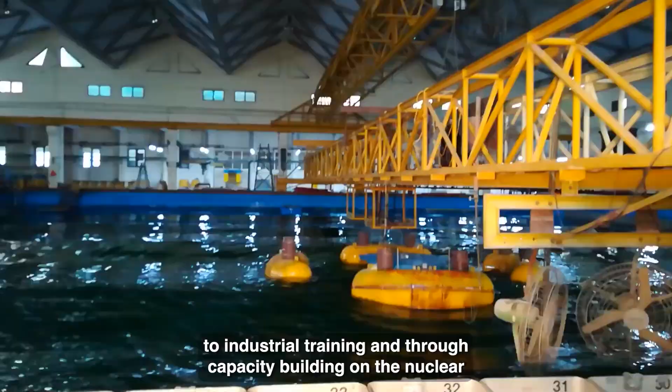This maritime engineering program is very special, with multidisciplinary input from mechanical, civil, structural, aerospace, naval architecture, chemical engineering, electrical, electronics, and applied mechanics. It is completely dedicated to industrial training and through capacity building in the new trade of the maritime sector. It's a booming economy offering job opportunities and research frontiers as India grows, with the Blue Corridor mission of the Government of India requiring maritime engineering growth. This program caters to that expected capacity building.

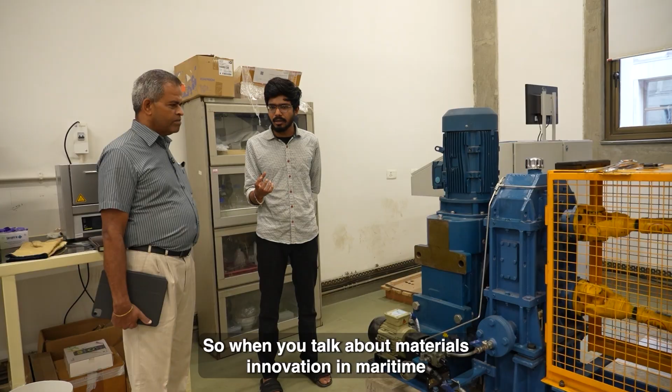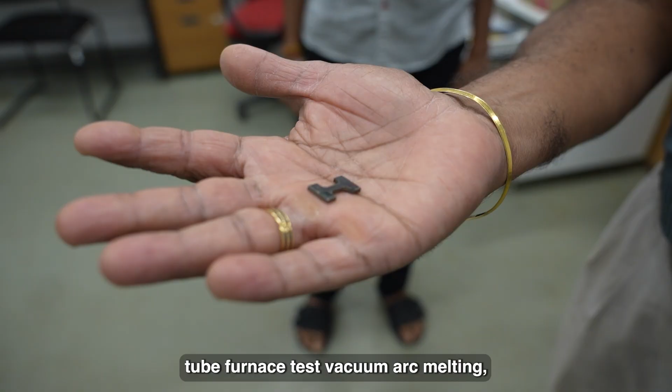This is part of the material science engineering laboratory, a teaching aid for the maritime engineering program. When we talk about materials innovation in the maritime industry, concrete and steel have been conventional choices for engineers, but we also have titanium vessels and high-speed craft boats made of fiberglass. These are advanced materials that do not always fit conventional standard design codes of practice. We conduct box furnace tests, tube furnace tests, vacuum arc melting, induction melting, vacuum induction melting, and vacuum sealing, all present in this small segment of the material science laboratory.

A typical furnace can test specimens at operating temperatures as high as 1200 degrees Celsius. At room temperature and ambient conditions, mechanical properties will not alter much, but as you'll see in the course lectures, the strength of material degrades when temperature rises beyond 600 degrees. So in fire resistant design, you must choose an alloying element such that the strength does not degrade beyond 600 degrees Celsius.

Welcome to the ambience of IIT Madras Lecture Theatre, one of the interesting classrooms where maritime engineering classes are conducted. We have state-of-the-art projection facilities and good audio-visual recording systems. Once a lecture is over, the system can generate PDF files directly, which are emailed to students' IDs. It's a state-of-the-art facility where lectures are recorded for life and shared with students immediately. This is the IIT Madras library.

The library has collections of books referred to as standard textbooks and references for the course and program. It also has many online editions of design codes of practice, reference materials, and e-collections of video lectures from international courses and programs related to maritime engineering.

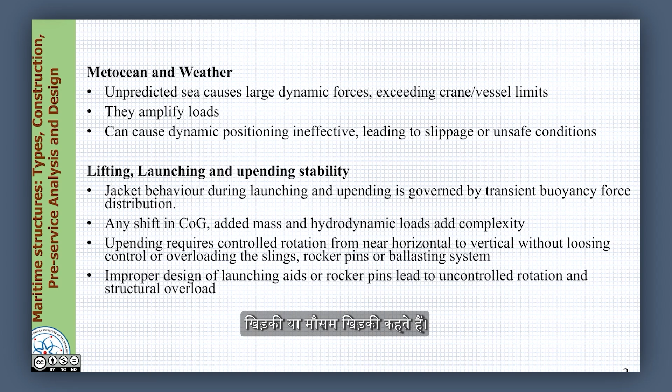When we talk about installation in offshore locations, two important phenomena come into play which govern the installation process: the weather and wave condition, which we call the metocean condition and the wave window or weather window.

Friends, in offshore conditions, sea can be highly unpredicted. Though there are models available to predict the amplitude, period and direction of sea depending upon the weather window and wave climate, we still call sea a random phenomena.

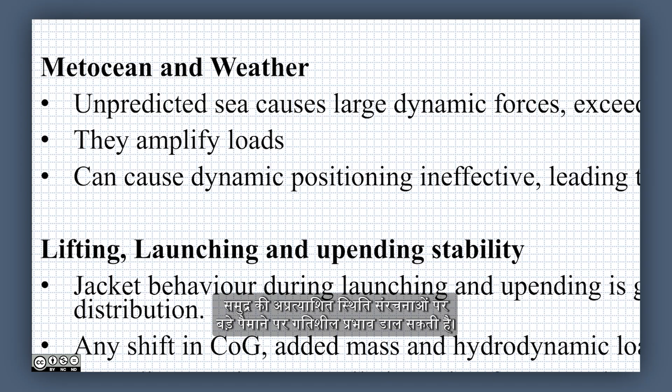An unpredicted sea can cause large dynamic effects on structures. If these dynamic forces exceed the capacity of the vessel transporting the platform, or the crane hooking up the platform, it can be a big challenge. Though a vessel or crane has a certain capacity, dynamic amplification caused by sea waves or wind can make them exceed these limits, causing a serious problem - it can even result in capsizing of the whole platform fabricated for a specific use.

So, the dynamic effects caused by environmental loads such as wave and wind predominantly amplify the loads acting on structures. In specific terms, these dynamic effects are referred to as the dynamic amplification factor.

These are dealt in detail in dynamic analysis of offshore structures. However, we will also touch upon certain effects of this in the coming lectures in this course for our understanding. Dynamic analysis is a full-fledged course offered under the Swayam portal, which you can look into, but for the interest of the learners we will cover certain aspects of this in this course as well.

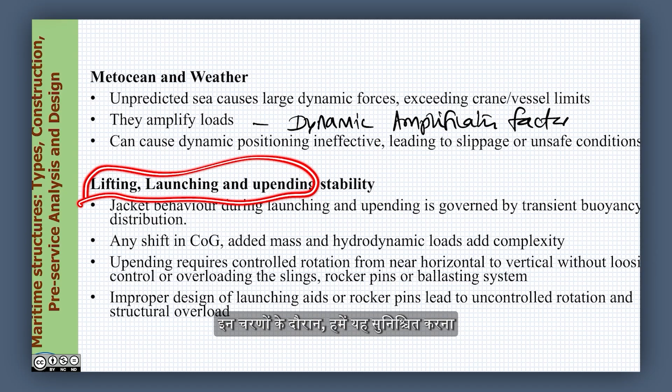Furthermore, friends, if you look at the steps in detail of an installation of a jacket platform, which we discussed in previous lectures, there are different steps and stages involved in installing a jacket: transporting, lifting, launching and upending. During these stages, we need to ensure that not only the jacket fabricated remains in place, but also the vessel or barge carrying it during transportation remains stable.

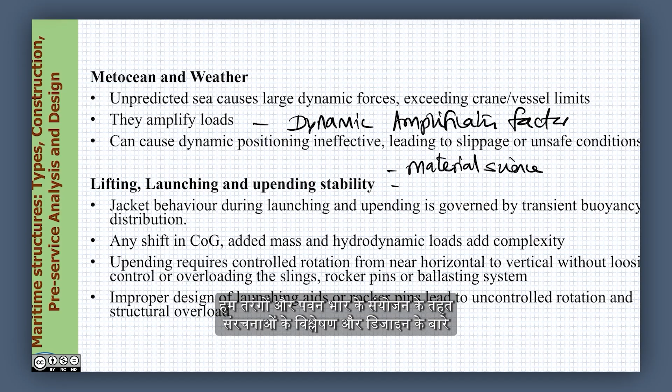So, here we are looking at different aspects of engineering. We are talking about fabrication and welding, therefore we talk about material science. We talk about analysis and design of structures under wave and wind load combinations, so we talk about structural engineering.

We also talk about operations, planning and preparing the installation process, so construction management. And of course, we also talk about the stability of the barge and the supporting vessels helping carry out this operation, therefore naval architecture.

So, friends, various disciplines are involved and various engineers are looking into it: mechanical engineer, electrical engineer, naval architect, structural engineer, and of course material science and construction executive. So various disciplines and specializations are involved. Therefore, one can say installation is not only complex by its process, it is also complex by its knowledge domain.

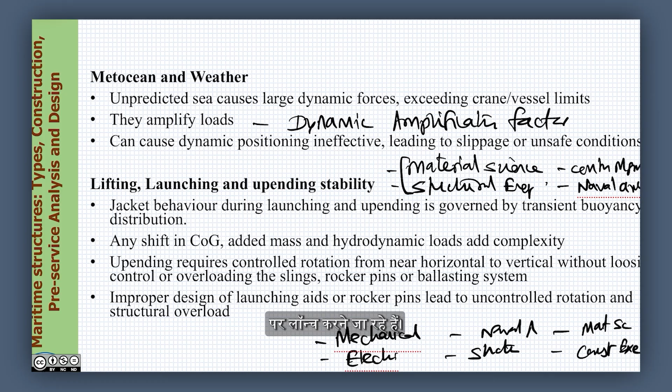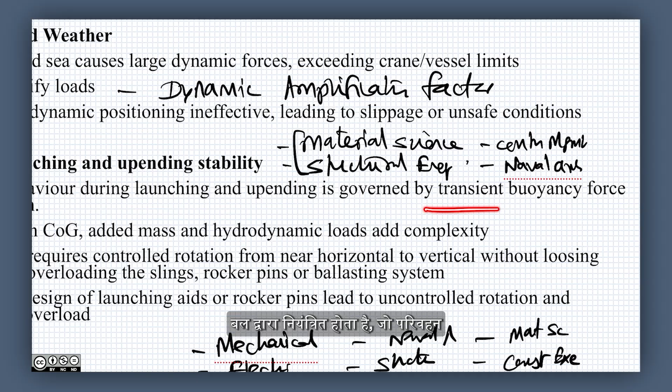Having said this, let us look at this specific complexity by imagining that we are going to now launch a prefabricated jacket onto a site of specific location. The jacket behavior during launching and upending is essentially governed by a transient buoyancy force which is activated during the transportation process.

When you have a jacket, which I will show step by step in the next slides - when you have a template structure or a jacket, the center of gravity, which is the mass center of the elements involved, can get shifted because of its lifting and launching operations.

When there is any shift in the center of gravity, and where there is any added mass caused because of its partial submergence during the launching process, then the hydrodynamic loads acting on those members will further add complexity to the whole process. So, friends, it is very important to consider the added mass effect and the hydrodynamic forces acting on the submerged or partially submerged members during the launching and upending processes, which are very important pivotal points in installing a jacket structure. In this whole process, the mass center or center of gravity of the whole system gets shifted.

When the center of gravity gets shifted, we understand that the structure retains or attempts to retain a CG by shifting the bodily rotation towards its center. That is a general tendency of any body to attempt to come to equilibrium. We call this specific property in offshore engineering recentering. We already learned this in detail in previous lectures. I request listeners to go back to previous module lectures to reinforce your understanding before we proceed.

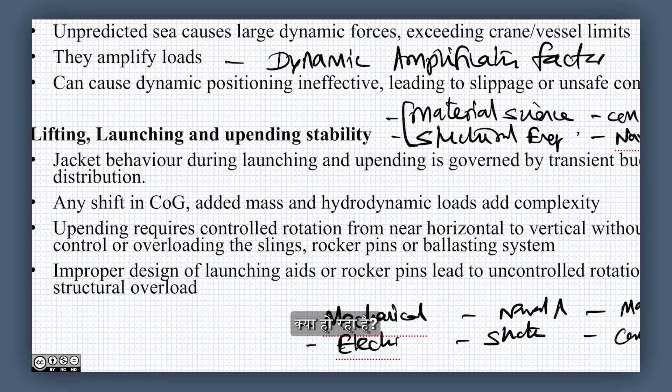Upending requires a controlled rotation, rotating the body from near horizontal to near vertical. During this operation, we cannot afford to lose control, we cannot allow overloading on the slings, and we cannot allow any additional friction or load on the rocker pins or the ballasting system.

The ballasting system is part of the barge or vessel which transports the jacket from the fabrication yard to the place of installation. Ballasting is adding additional weight to the barge to maintain its stability. Deballasting is removing this weight to again maintain stability. This ballasting and deballasting operation happens in all ships, and in barges as well, to maintain stability during flotation.

We cannot afford to lose ballasting control, or allow additional rocker loads on rocker pins or overloading on the crane hook slings, which could initiate failure from slippage at the crane drops. Lifting, launching and upending stability actually governs the whole operation of installation, for example in a jacket platform. Let us see what further consequence or complication happens in the installation of a jacket.

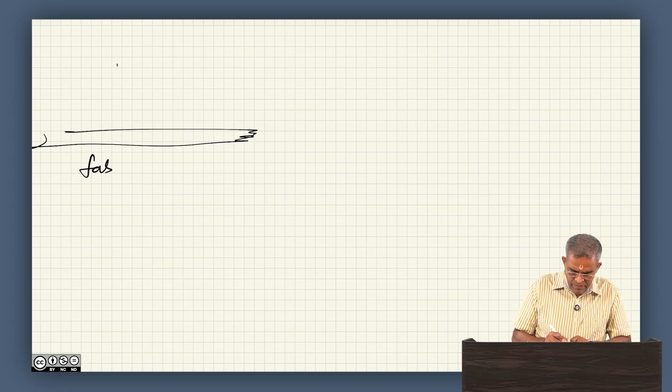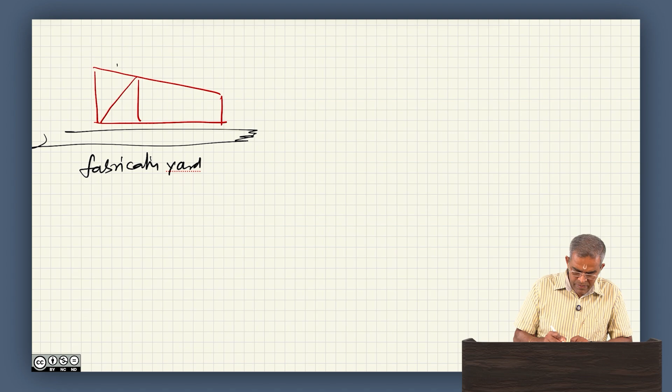Once the jacket is transported, let us recollect the steps involved from what we learned in the previous lecture. We have a fabrication yard where a jacket is fabricated. Now, the jacket has a specific CG or COG where the mass center is located. This is the fabrication yard.

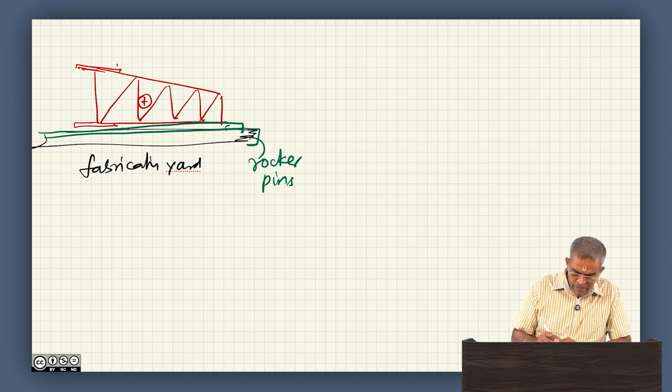In the fabrication yard tip, we have rocker pins and we have slide rails, where the jacket is virtually pushed along the rail towards the rocker pins. When it is pushed towards the rocker pin, the barge is here - let me draw the barge as well.

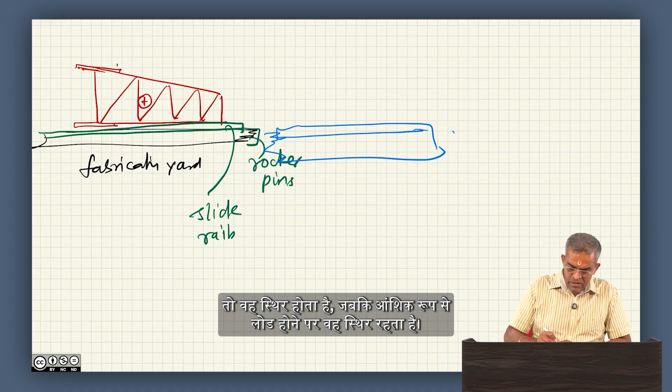Let us say this is the barge. When the jacket is pushed and launched on the barge at the rocker end, it is essentially moving, and when it reaches this stage, the barge is partially loaded. Remember that the barge, when symmetrically loaded, is stable. When the barge is partially loaded, there is a probability that it may experience excessive roll or excessive pitch. So this has got to be controlled by ballasting the barge to create an additional counterweight to balance this.

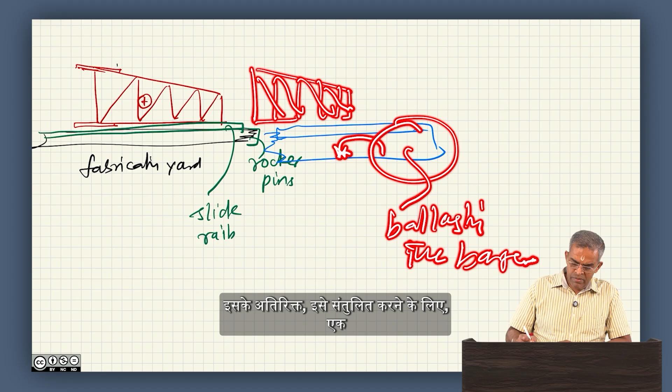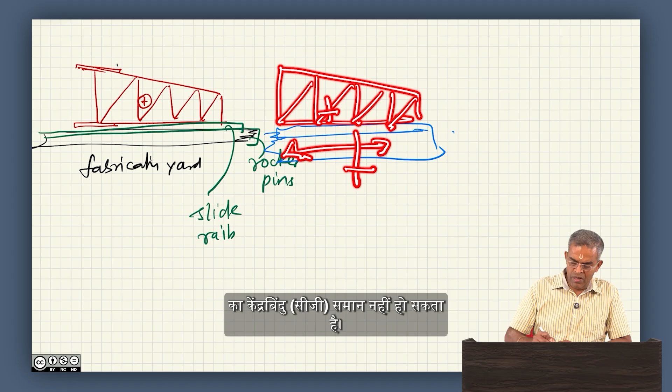Once the jacket is completely placed in position on the barge, there can be a perfect balance of load. Still, remember, the CG of the barge and CG of the platform may not be the same. This can cause an additional moment which can induce roll or pitch to the barge, for which the barge should be able to sustain this. That goes without saying. But however, there is expected to be a balance of the load acting on the barge, for which the barge stability is already ensured.

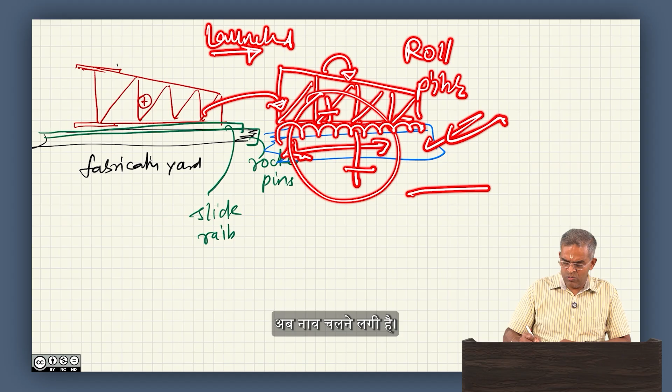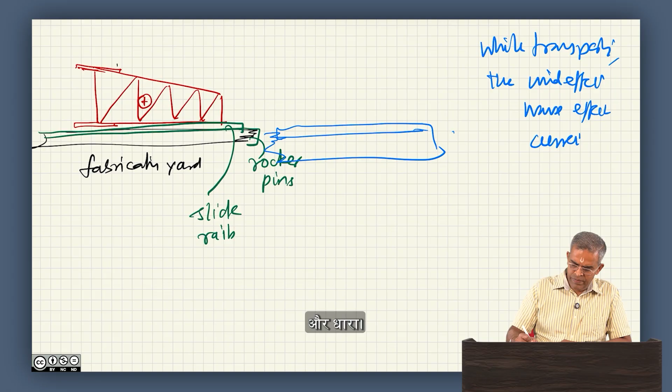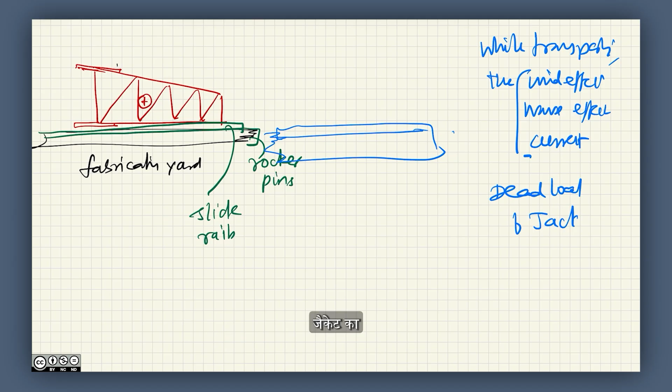So now we have launched the jacket from the fabrication yard onto the barge. Now the barge is moving, we are transporting. When you are transporting, the wind effects while transporting, the wave effect, and the current, in addition to the dead load of the jacket, should be taken care of in the design.

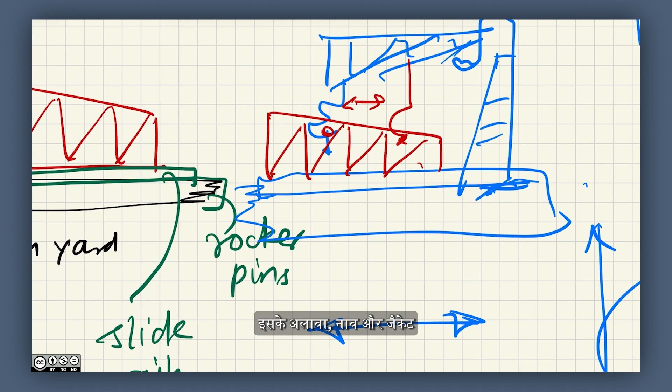The jacket should remain stable during the transportation process. Remember, the barge will also have supporting cranes to help this process. So the jacket placed on the barge will be held in position so that it does not move. In addition to this, friends, both on the barge and on the jacket there are slip rings and sea fasteners.

These are placed in position so that the jacket is locked on the barge. You must have seen this, a very interesting operation, which I can give a very simple example to help recollect this.

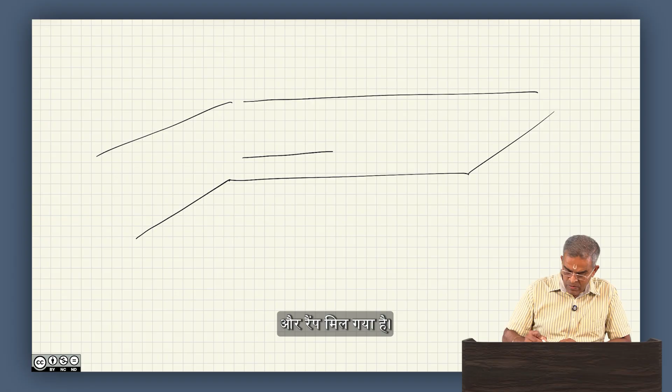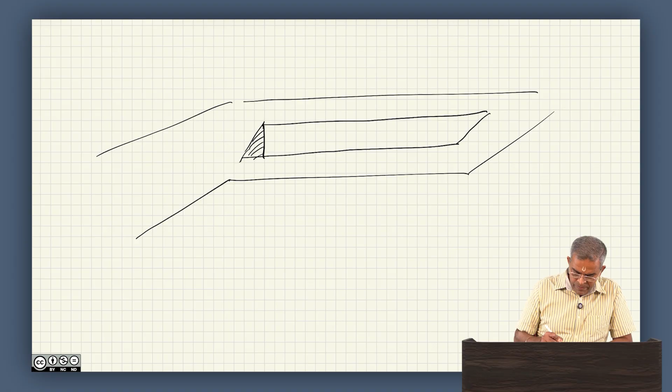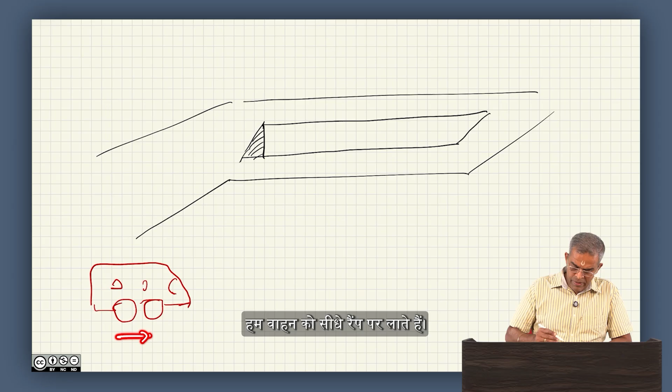Let us say you have a ramp arrangement, and the ramp has got a design like this, whereas this portion is hollow. So when you want to clean your vehicle for servicing, what we generally do is bring the vehicle on the ramp, and we move the vehicle so that the wheels are placed here.

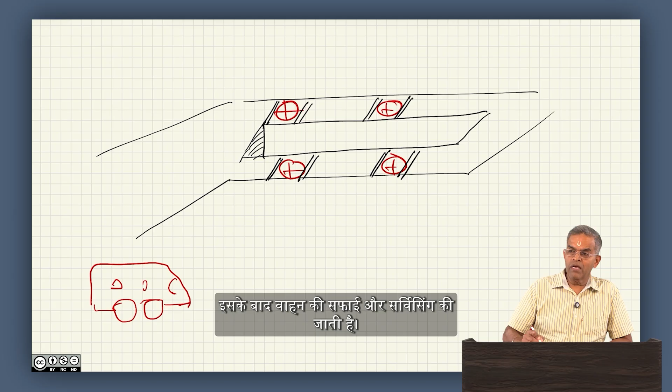Once the wheels are placed here, then you must have noticed that these wheels are locked. Then the cleaning and servicing of the vehicle takes place. Similarly, in aircrafts, when the aircraft is parked on the bay, you would see the wheels of the aircraft are also locked, so that it does not move when loading, unloading cargo, or passenger embarkment takes place. Similar to this, friends, I have here slip rings and sea fasteners to hold the jacket in place, so that it does not move to and fro, oscillate, or slide when the barge is moving.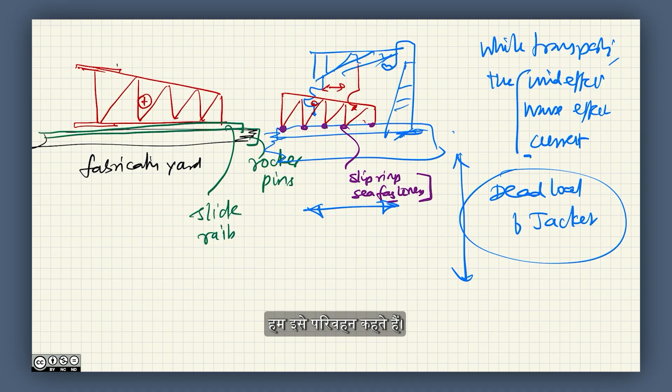So now we have placed the jacket on the barge. Now the barge is moving, we call this transportation. When the barge reaches the site with the jacket in place, now the jacket has got to be placed in position. Let us say this is the probable location where the jacket has to be installed. This is sea level, this is water level.

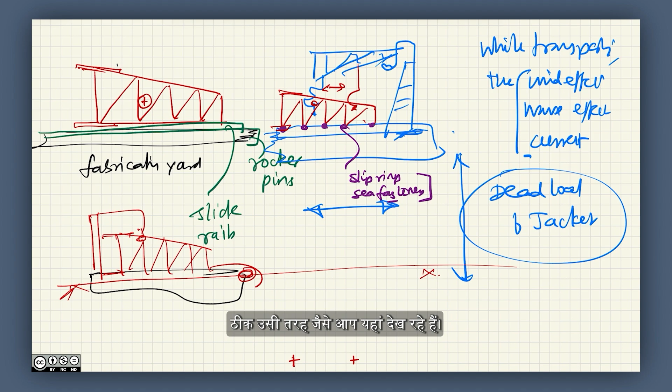So now I have to have a crane which holds the jacket, and the jacket is slided with a rocker in the same manner as you see here, and it is upended - let us say uprighting. During this uprighting, you will notice that some of the members may get partially submerged, some may not, is it not? The partially submerged members will have added mass effect and additional hydrodynamic forces, for which this should be designed. So now once it is upended and the jacket has become vertical...

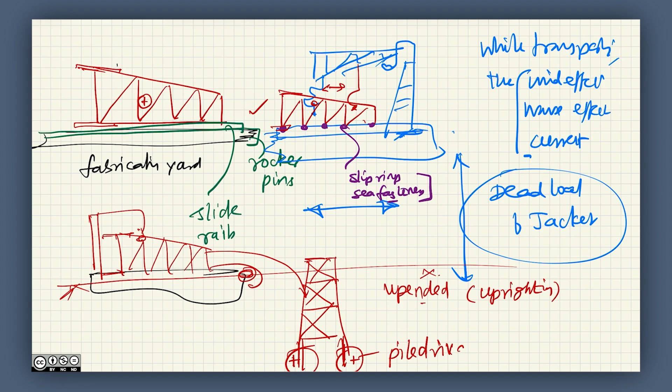You have to do the pile driving. So we are now coming to the complexities involved in pile driving and interaction. The final support of the whole structural system relies on how strong and firm the piles are driven into the seabed and how firmly they are connected to the structural system of the jacket. So the pile penetration and skirt pile penetration on varied soil conditions govern the important aspect of successful installation of a jacket on site. When I say pile driving, we are talking more importantly about the soil structure interaction.

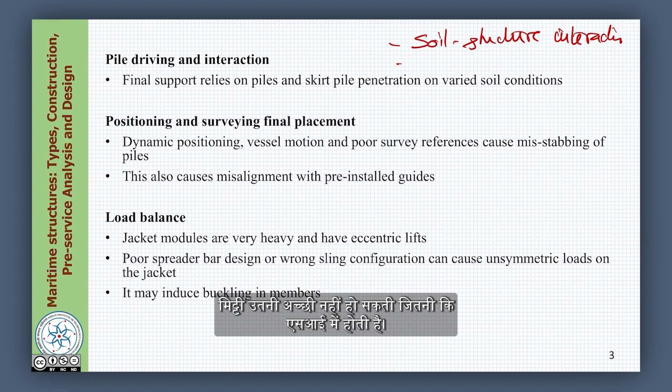Remember, friends, on ground or onshore, the soil may not be as wetted as it is in the sea. Therefore, the marine clay or marine soil conditions and composition are different from that of the soil on shore or on site on ground. They can be different. Even if you have a submerged water table, the soil conditions in marine or maritime systems can be different from the soil condition under a dry state system on earth or onshore.

Therefore friends, the pile driving and the pile positioning, and then fixing the structural system to the pile properly has got to be taken care of carefully. If it is not done, this can induce additional complexity of failure.

We are now looking at what are the different processes involved in installing a maritime structure, example jacket platform, and we are looking at every stage how this can induce additional forces which can cause failure or complexities in the whole process. Now, once the pile is driven properly and fixity is ensured, then comes the question of final placement, what we call positioning and surveying the final placement.

Of course, the jacket has got to be placed in a specific position, because it is not simply to be placed wherever you want. It is to be placed at a geographic system where oil exploration can take place. So we have identified the spot, we know the location, and the jacket must be placed at that specific location with practically zero tolerance. To ensure that, we need to check the dynamic positioning and survey of the final placement once it is commissioned.

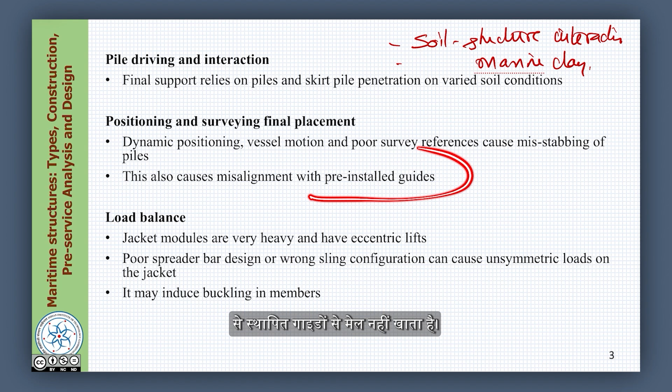This can also sometimes cause misalignment, which does not match with the pre-installed guides. We already have a template installed on the seabed. The pile should go and sit in that specific template location, but there are possibilities where misalignment happens and it does not sit in a specific location. Of course, there are tolerances for all kinds of jobs, but practically we wish to achieve a zero tolerance procedure.

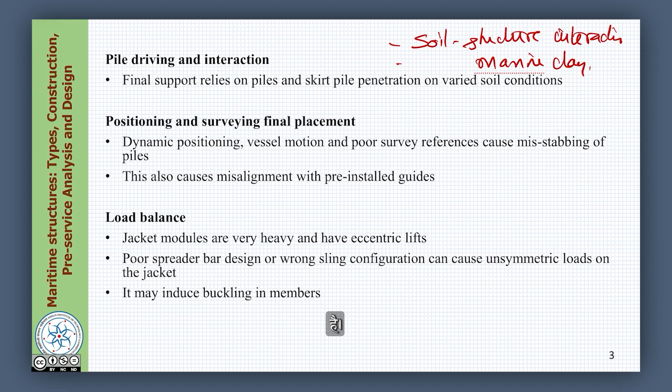During this whole exercise, friends, remember that there is a perfect load balance to be maintained. We are working offshore now, okay? It is not land based, so you cannot put a lot of extra supports to hold the system until the load transfer mechanism happens. Here the jacket is upended and resting on the seabed on its own weight, but of course external excess buoyancy will try to push the jacket upward and so on. We need to check the load balance.

We understand the jacket modules are very heavy and sometimes they have eccentric lifts also. You have seen a jacket geometry in the previous lectures. Because of appurtenances attached to the platform system, the weight or the center of gravity may not be exactly at the center in terms of its vertical axis. There can be some eccentric lifts which can happen during the upending and launching operations.

Therefore, friends, poor spreader bar design or wrong sling configuration can induce unsymmetric loads on the jacket. We already saw in a previous lecture what could happen if a member is under unsymmetric loading, and we discussed this very clearly in those cases. We also learnt what kind of additional stresses are induced in curved beams when the wrong sling configuration of a crane hook is used, as we saw in the derivations in previous lectures.

So during operation there can be a possibility of unsymmetric loading happening on the jacket. The most important worry here is that since the jacket members are long and slender, because we want to avoid the number of connection points, due to welding complexity, we cannot afford to have a lot of connection points, because the intersection points will induce stress concentration. We will talk about that in the coming lectures.

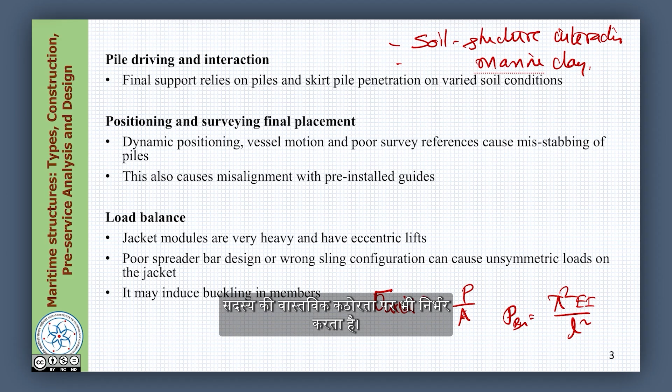Axial load capacity or axial stress is simply the load by area, whereas to compute the buckling load we talk about pi squared EI by L squared, which is the Euler's buckling load, which depends not only on the configuration but also on the flexural rigidity of the member. So the moment of inertia about the bending plane, and the length between the connection points, otherwise called effective length, plays a very major role in controlling this.

So, in general, friends, with the information we have, we can say that generally the buckling load capacity of a member is lesser than its axial load capacity.

A member may be safe in axial load, but may become unsafe under buckling conditions. Buckling will be induced during this construction process because of two reasons: eccentric lifts, and sudden slip caused by wrong sling configurations. Once the member buckles, the load carrying capacity of the member gets degraded, and therefore the jacket cannot sustain the design load.

So then the question comes, how will you manage the topside compensation of these loads after you install this jacket? We will talk about that later, but load balance becomes a very important aspect in the installation process, as we discussed.

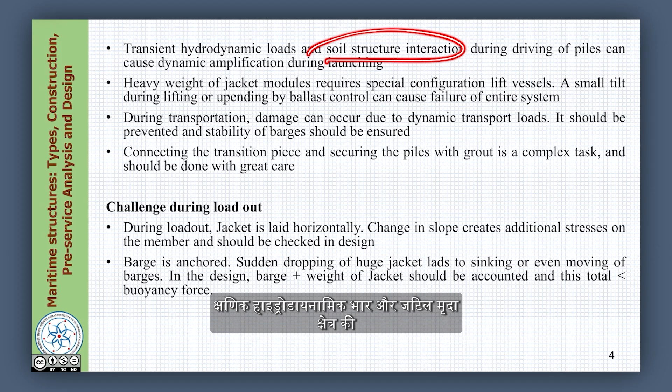The transient hydrodynamic loads which arise from additional wave swelling effects are additional transient loads that do not remain for a longer period, but have an impulse effect on the member, and they happen to attack the members during installation process. These are additional loads that the members are not designed to sustain. These kind of transient hydrodynamic loads and complex soil structure interaction during driving of piles can also amplify the dynamic effect during launching.

Of course, we agree that jackets have heavy weight structures, therefore we require special lift vessels to hold these jacket structures. We cannot use a conventional barge to do this. Launch vessels are configured in such a manner that they are able to maintain balance when transportation or launching happens. So we need special configuration vessels for transporting jackets. A small tilt during lifting or upending by ballast control can cause failure to the whole system. So it is very important to choose a proper lift, launch and transporting vessel or barge to do the jacket launching. During transportation, when the jacket is being transported from the fabrication yard to the installation site by the barge or on the barge.

Damage can also occur during this transport period. It should be prevented and the stability of barges should be ensured. Generally when the jackets start tilting about its CG, which is not essentially in its center, this can cause additional roll and pitch on the barges, and that can improvise instability in a hydrodynamic perspective to the barges. So the barges should be tested and ascertained that they remain stable during the transportation operation.

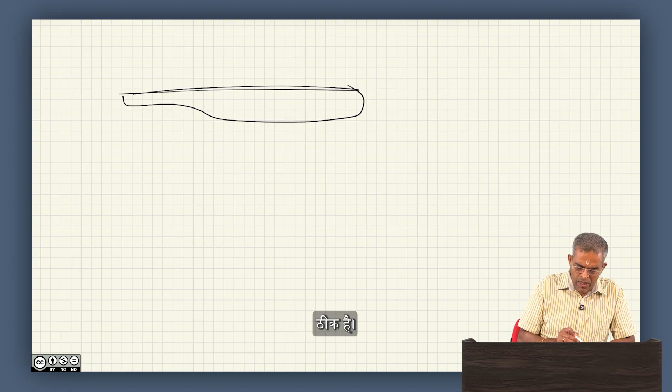When the barge is anchored in position to hold the jacket onto it, sudden drop of a huge jacket can also cause imbalance on the barge. You have a barge, and you have a jacket which is huge in size.

When you start loading this onto the barge suddenly, the barge may lose its stability.

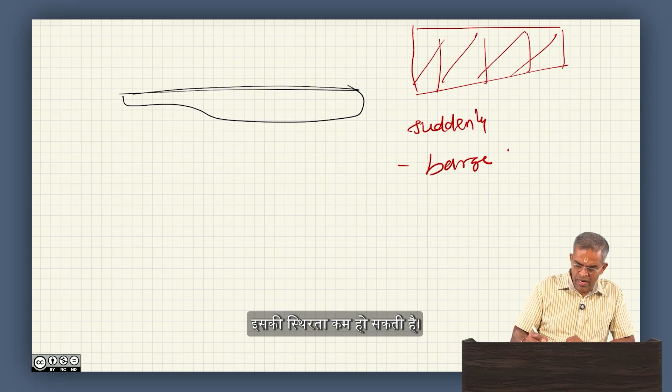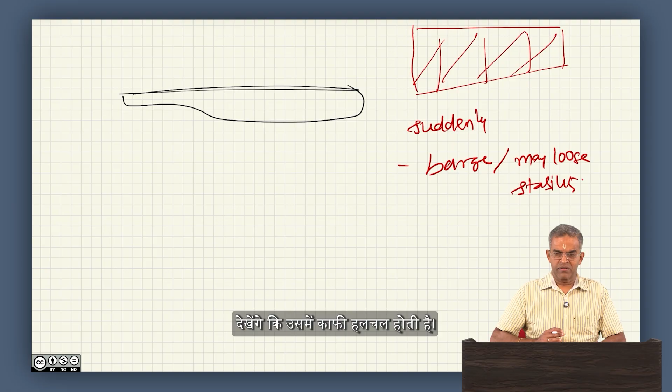You must have seen this when boarding a passenger vessel from the coast. As people keep loading, the vessel will start rolling, and somebody has to help hold your hand to bring you from the port to the vessel. Similarly, when you leave the vessel, if it is very large and stable, you will not notice this roll motion. But if the vessel is not that stable and large, you will notice the roll is quite significant. So when you have a load out operation, suddenly or any slip happens, this will increase the destabilizing condition onto the barge.

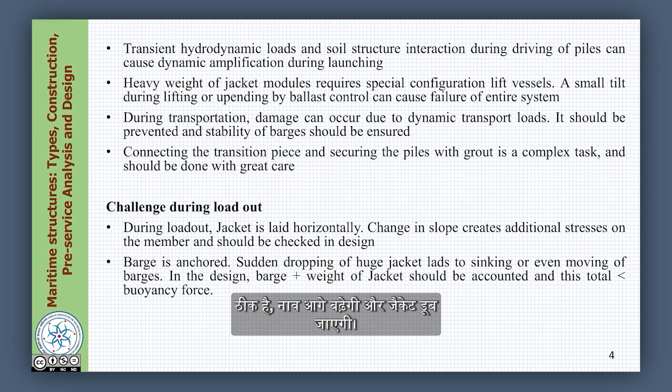So the barges, if loaded suddenly, can cause destabilization. Sometimes, friends, it can even cause sinking of the jacket because the barge will move, though it is anchored. The barge will move and the jacket will sink. Of course, there are crane hooks and slings which will hold the jacket from the fabrication yard, which can be recovered, but the operation is unsuccessful.

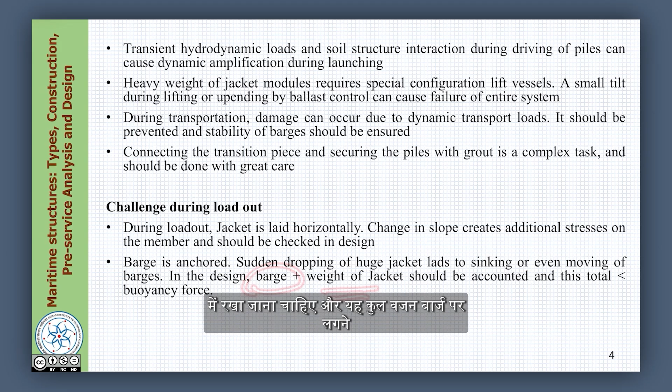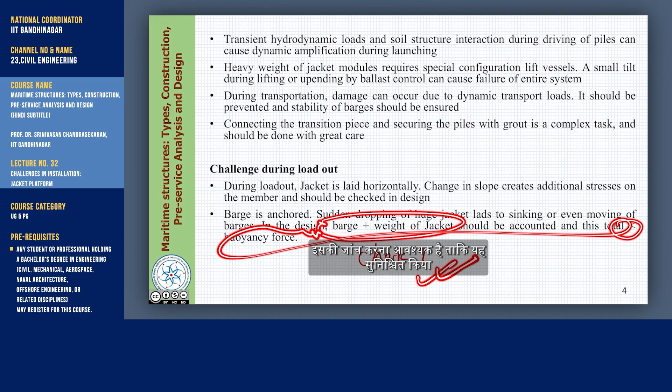So therefore, in the design, barge plus weight of the jacket should be accounted for, and this total should be lesser than the buoyancy force acting on the barge. This check has to be done, and it is very important, to maintain and ensure that the barge will not get into a destabilizing mode when the jacket is loaded out onto the barge.

Let us now see what are the different processes of installation and what are the critical loads acting during this process. The first one is a load out. I have made a line figure of this from the fabrication yard. The jacket is loaded out on the barge.

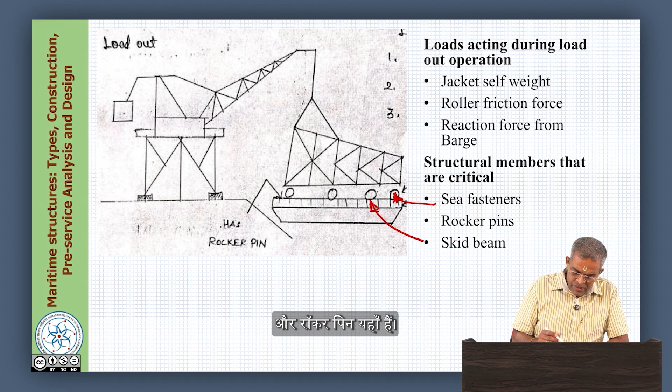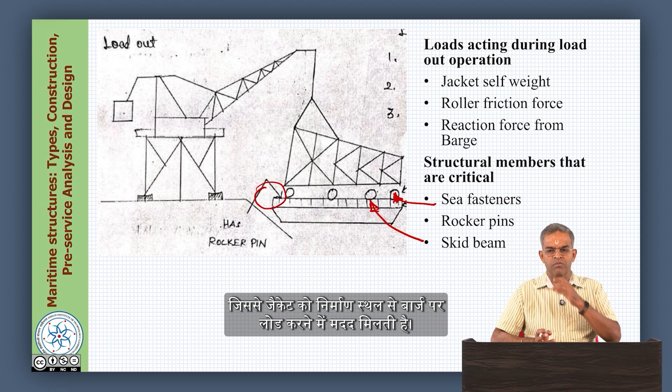The critical structural members here are of course the sea fasteners, then the rocker pins, which are also very important, then the skid beam. This is the skid beam, these are the sea fasteners, and the rocker pins are here. The sea fasteners are actually the lockers which lock the jacket on the barge, so that the jacket does not move horizontally or laterally. Skid beams are used to move the jacket to and fro during the launching and load out operations, and rocker pins enable the jacket to rotate, which helps to load out the jacket from the fabrication yard onto the barge. These are very critical elements which need to be taken care of in the check.

Let us see what loads act during the load out operation. Of course, the self weight of the jacket is very important. The rollers, where the jacket skids and rolls over, experience friction force which plays a very important role. The roller should sustain this force so that it does not get damaged and enables rolling comfortably. Also, when the barge is partially loaded, the reaction force from the barge should be accounted for—the barge should not move or get destabilized during the load out operation. So the jacket self weight, roller friction force, and reaction force from the barge comprise the critical force combinations in the load out operation. This is operation number 1.

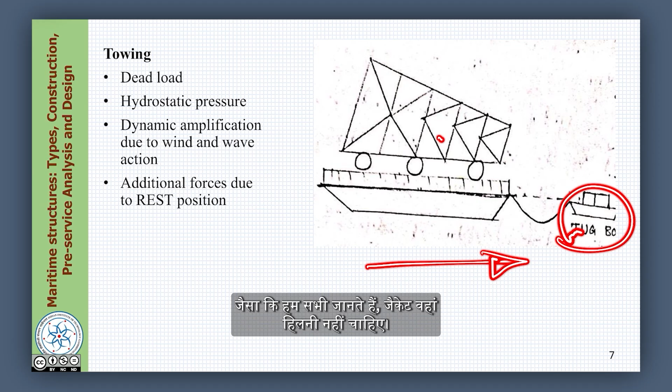Once loading out happens, the jacket is on the barge. Now I am going to tow the barge using a tugboat. During towing, as we all know, the jacket should not move, is it not? So the sea fasteners will lock the jacket with the barge so they will not move. Then what are the forces acting here?

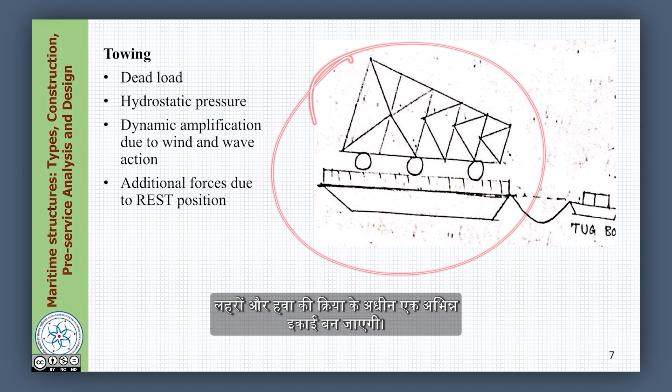The dead load of the barge plus the jacket, the hydrostatic pressure caused because of this towing, and the dynamic amplification because of wind and wave acting on the barge and wind acting on the jacket—they all get dynamically amplified during the towing operation. Further, there can be additional forces when the barge is at rest position, because tugboats cannot continuously pull this from the fabrication yard to the destination. Under rest position, the whole system becomes an integral unit subject to wave and wind action. If the jacket is not placed in relation to the CG of the vessel, or if it tilts because of failure of fasteners, this will induce additional moment on the barge and the barge may get destabilized. So these are the forces acting during the towing operation, the second operation.

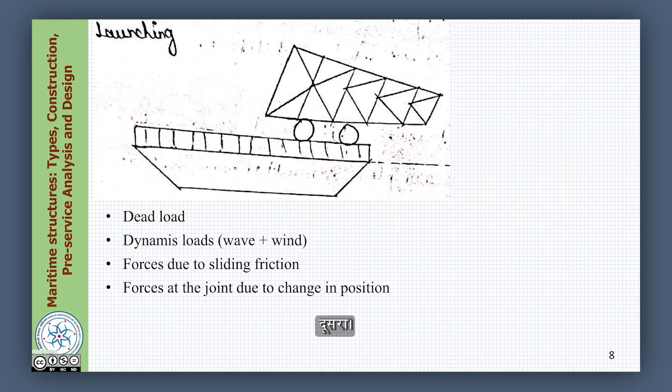The third one is the launching, that is, from the barge I have got to push out the jacket onto the site. This is called launching. During launching, what are the forces acting, or what are the forces governing this operation?

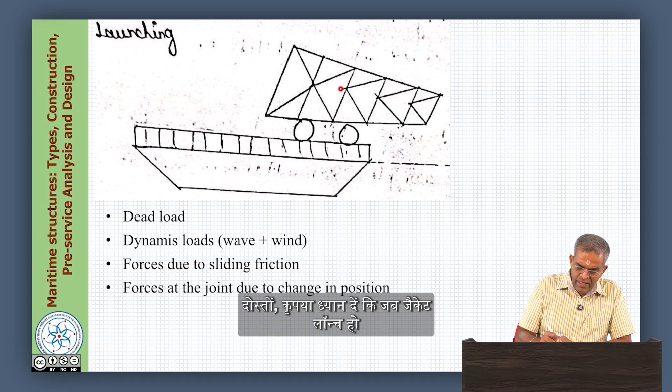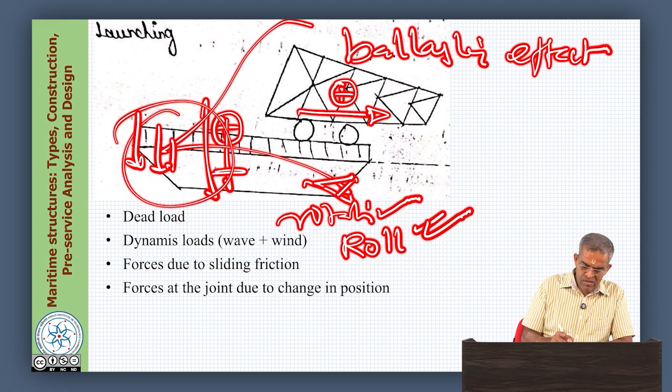One is of course the dead load. Friends, please note, when the jacket is getting launched, when the CG is shifted away very much from the CG of the vessel, it will now experience rotation, is it not? This will now encounter excessive roll. The vessel should not get destabilized during this operation. How do you do that? You have the ballasting effect here, which will counteract the weight, add ballasting weights here to control this additional roll.

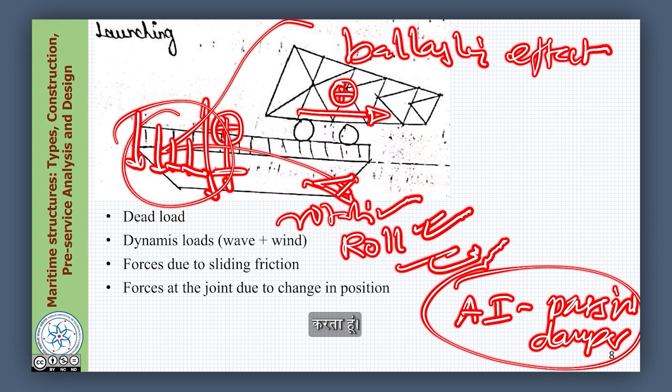There are of course additional methods by which roll control can be done. We have explained this process for a drill ship using AI driven passive dampers. This can be a very interesting PhD research problem where the whole launching and load out operations can be maximized for operational safety in the maritime sector. I invite people to undertake this research under our guidance at IIT Madras. So let us see what are the additional forces that critically govern the launching operation.

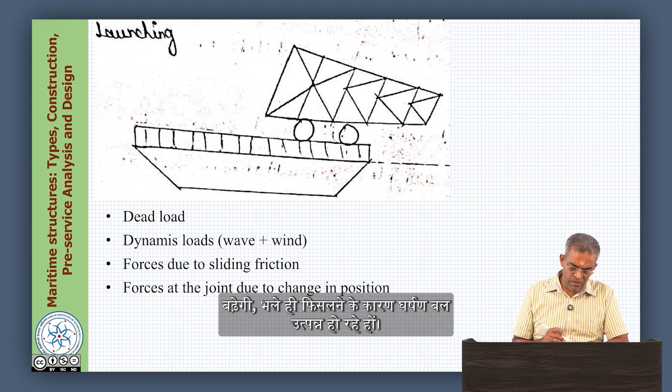As we said, excessive roll is caused by the dynamic effects of wave and wind. Forces are also caused due to sliding friction, because it is sliding now, that can be an additional force. There are also forces at the joints due to change in position. That is very interesting, friends - even in the jacket, when the position is changed from here to here, the joints will now experience different forces. So these joints should be checked for that kind of operation in the analysis.

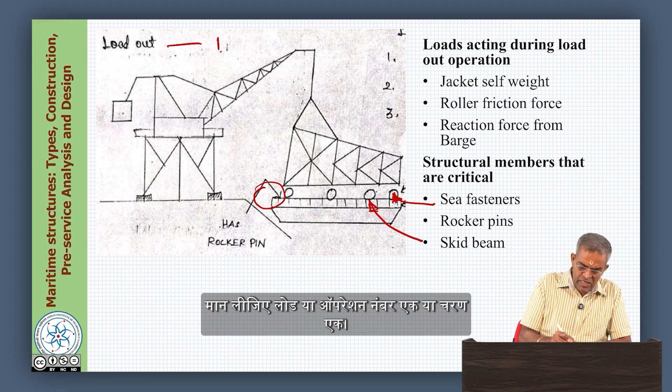So during launching is a third operation. Let me write down these operations very carefully. Let us say load out operation is stage 1, towing is stage 2. Once towing is done and has reached the site, then launching is stage 3.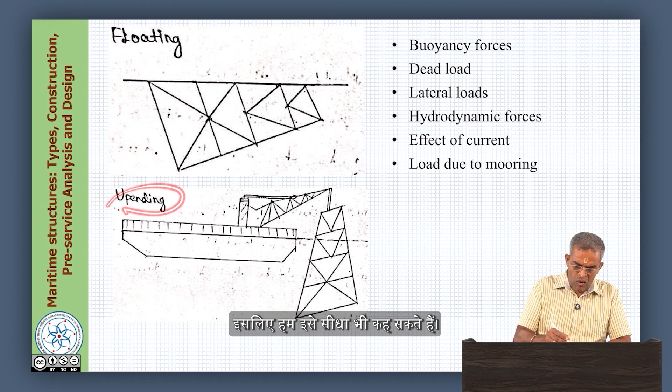Then comes the floating. Let us say the jacket is now launched in the sea, of course it is held with the crane. Now it is floating, and then gradually it is uprighted. So we can also call this uprighting or upending. Let us say this becomes the 4th stage, and this becomes the 5th stage.

During this stage of construction, the critical forces governing them are the buoyancy force, because the buoyancy will now govern the design as it is floating, the dead load of the jacket, the lateral loads caused by wave and wind. Of course, the wind effect is lesser, but the wave effect is phenomenal. The effect of current also plays a role here - current is most predominantly present on the surface of waves, so it is very effective. There are also hydrodynamic forces caused by waves and the load due to mooring of the vessel.

That is a very important governing factor here. The barge should stay in position during upending. If the barge moves, the barge is unstable, then upending cannot happen properly. So during floating and upending, these are the governing forces which need to be considered in the analysis.

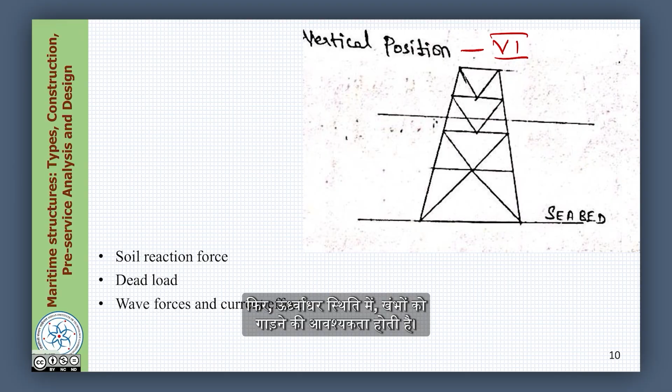Once the jacket is in the vertical position, let us say this is operation 6, in vertical position, then piles need to be driven. So now I am worried about the soil structure interaction, the dead load, and the wave force and current effects acting on the jacket.

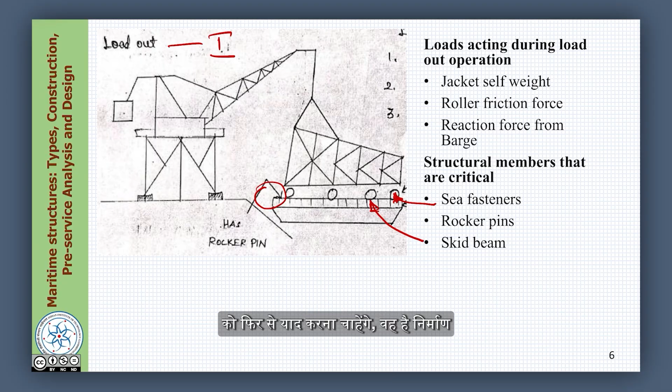So friends, in the sequence of operation, what we like to recollect again: fabrication, of course, one part happening on the land, then load out, then towing, then launching, then floating, upending and vertical position. These are the different stages of installation in maritime structures. This is generally applicable to all large maritime structures like gravity based platforms, jacket structures, guyed towers, large floating structures, etc.

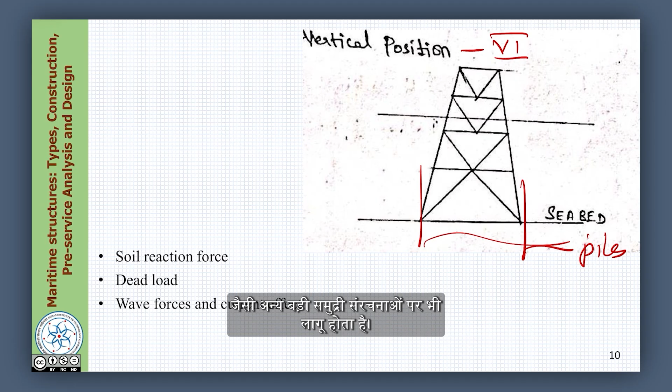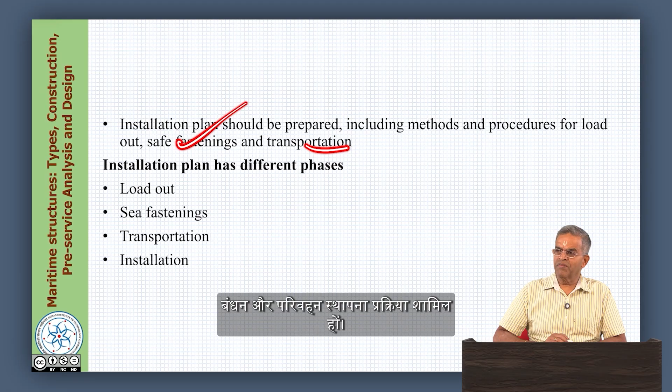Let us talk a few minutes about the planning and execution during the installation process. The installation plan should be prepared including the methods and procedures for the load out operation, safe fastenings and transportation. Installation process has different phases, as we saw: load out, sea fastenings, transportation, installation.

Let us try to understand more about sea fastenings. Sea fastenings are actually ties and fastening locks together, used to hold the jacket on the barge during transportation or during the launching operations. They should be designed in a proper manner, provided both in the barge as well as in the jacket, and their major function is to prevent sliding and shifting while in transit. For example, when an aircraft is landed, the wheels are locked. When you are leaving your car for servicing, the wheels are locked. This lock is what we call here as sea fastenings.

During towing, including the platform, sea fastenings and barge should be analyzed for gravitational, inertial and hydrodynamic loads. Analysis should be conducted based on basin tests for beam sea, head sea and quarter sea conditions. Beam sea, head sea and quarter sea conditions - for all conditions of wave direction, you must check the analysis for its safety.

Now friends, a very peculiar problem: I have a barge, let us say of a specific capacity.

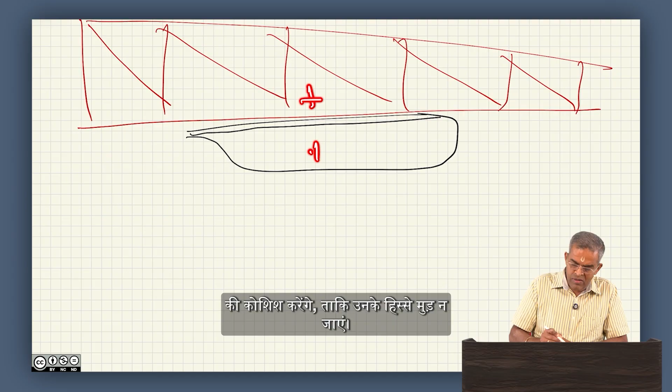But the jacket is longer than this. Okay, it can happen. You must have even seen on trucks where people carry large pipes longer than the chassis of the truck. It happens. You must have noticed that they try to place the pipes at the CG of the truck

so that the members do not bend. If this would have been placed like this, you will notice that these members will experience excessive bending and buckling. So, when the jacket is longer than the barge, the problems are slightly different.

For large size jackets, when they extend beyond the size of the barge, submergence will occur during towing. This submergence will have added mass effect and additional forces caused by wave slamming, buoyancy and collapse forces. These should be checked in the analysis and design prior to the design being completed.

Furthermore friends, when the jacket is being towed and is longer than the barge, it will also cause something called wind induced vortex shedding vibrations. This will cause second order effects on the member stresses.

To avoid this, one can bundle the whole jacket by wrapping wire rope helically around the members. This can save the jacket from the effect of wind induced vortex shedding vibrations. So, there are problems, and there are solutions also available in the literature.

So, by experience, the maritime engineer decides what kind of barge he hires, how he places the jacket on the barge, and how safely he transports and transits the barge from the fabrication yard to the construction site.

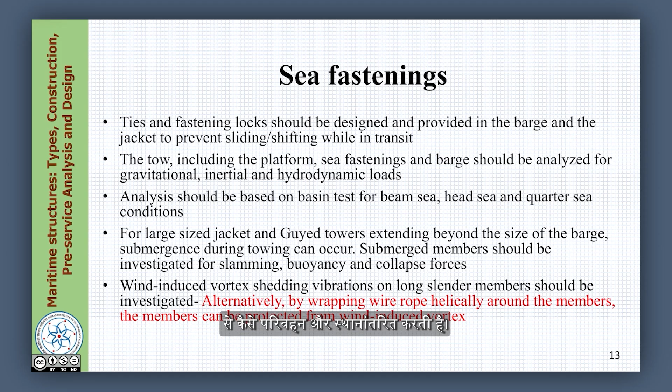Having said this, during launching and uprighting, the guyed towers, template structures etc. are launched near the installation site. We know the jacket is moved horizontally, longitudinally, then terminated at the rocker arms and launched onto the deck of the barge. We already saw that procedure.

When the jacket position reaches the point of unstable equilibrium, the jacket rotates. We know that, is it not? As I keep on - look here, this is a barge, let us say the barge tip, the rocker arm. So, keep on sliding the jacket, and you will see when the CG crosses this arm, the jacket will automatically rotate, because of its weight.

But in this case, the deflection of the rocker beam and force on the rocker arm governs the design now, because if the rocker arm crushes or the rocker beam is not able to take the load of rotation, then it fails and gets stuck there. So, one has got to also look at the design of these and they should be checked properly.

Large floating structures are generally lifted into vertical position by cranes. Therefore, hook loads, which will govern the design construction process, should also be checked for the upright operation.

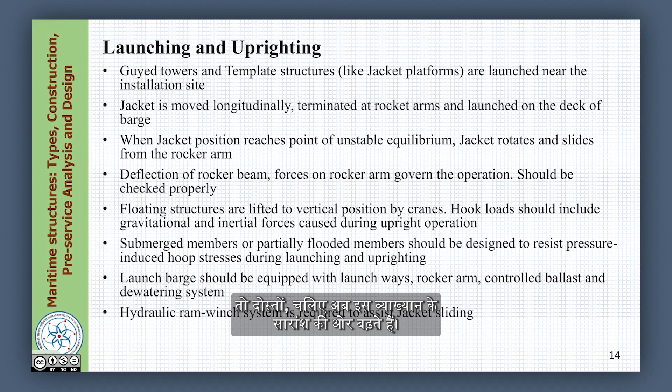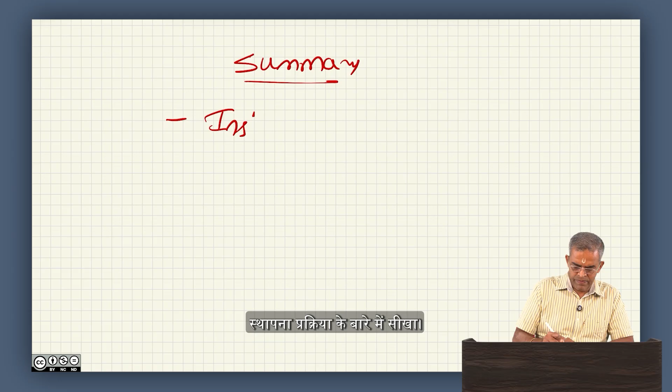So, friends, let us come to the summary of this lecture. In summary, we learned the installation process and understood the different steps involved in installation. Of course, we learnt it with an example of a jacket structure, but they are more or less common to all large floating structures like guyed towers, gravity based structures, etc.

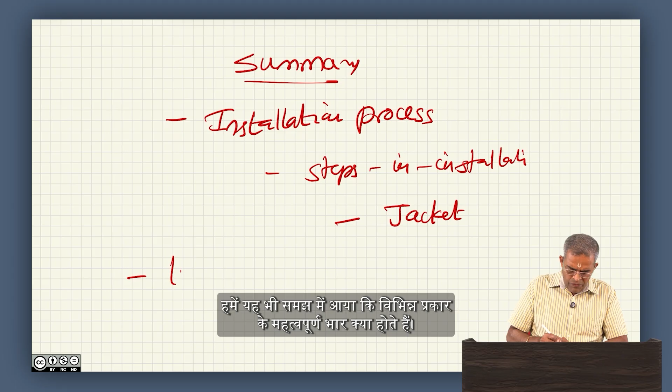We also understood the different critical loads that act during installation and what loads and design elements should be checked. We understood that the loading operation is quite cumbersome and quite uncertain. Therefore, various design checks are necessary to ensure safe installation.

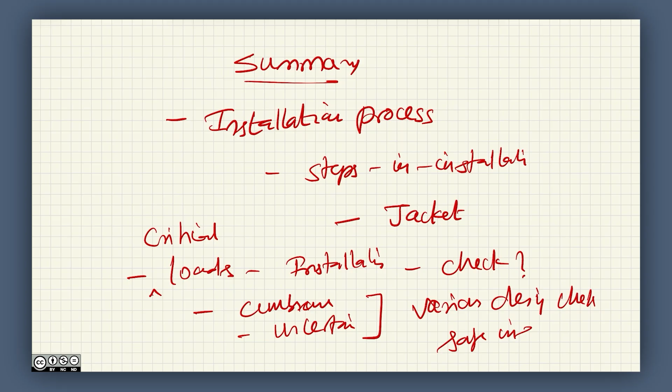So, friends, I would love to show you a video where a real time installation happened, but because of strategic reasons this cannot be shown to you. However, there are short videos available in the open domain. I will urge you to look at them conceptually to understand and then correlate the contents of the lecture to understand the engineering perspective behind this.